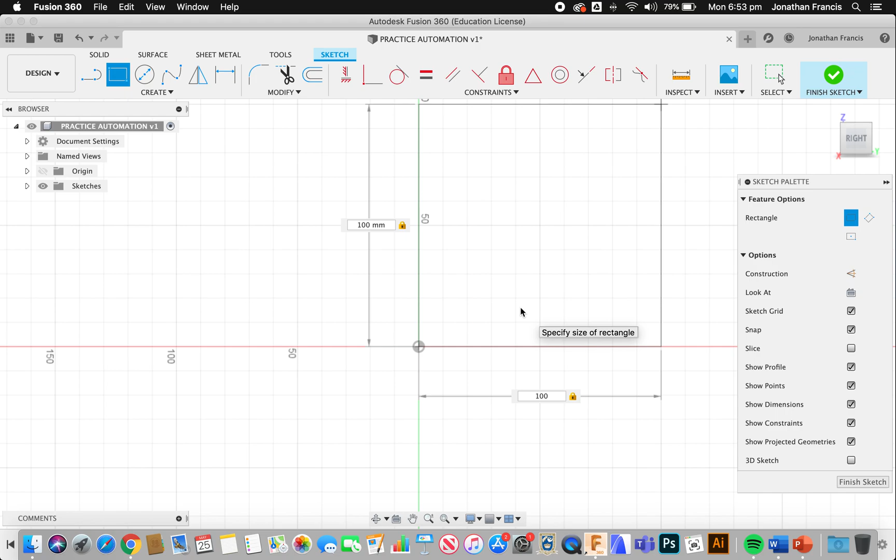Rectangle 100 by 100. We're going to extrude that 3, and that we have is the first shape. Now that's a body, so over here on the left hand side we're going to right click, create components from body. We call this the right side. It's important that we name our components just to keep track of everything.

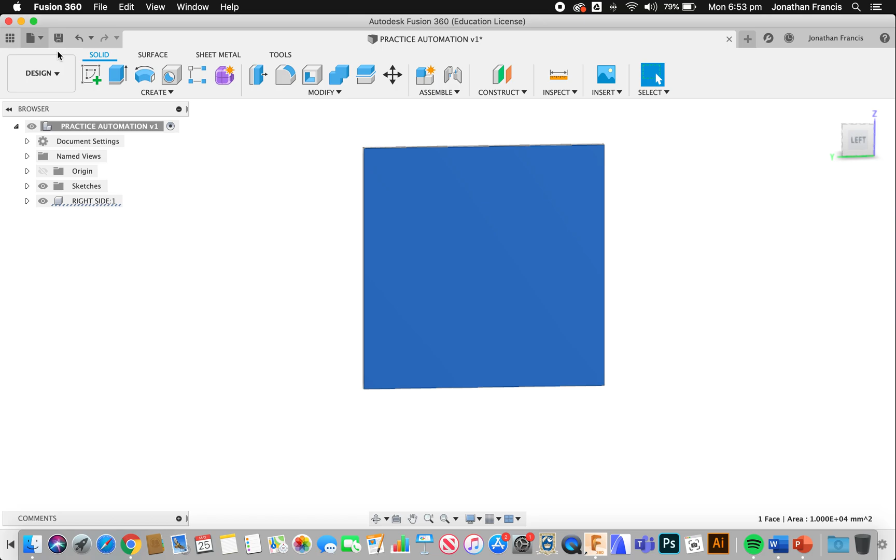Now I'm going to rotate this around, so I'm looking at the left side. I'm going to put a sketch on there, rectangle from the top point, 100 wide, 3 deep. And the reason that we're using 3mm deep for all of these is because our MDF is 3mm deep, and that's what we're going to cut it out with the laser.

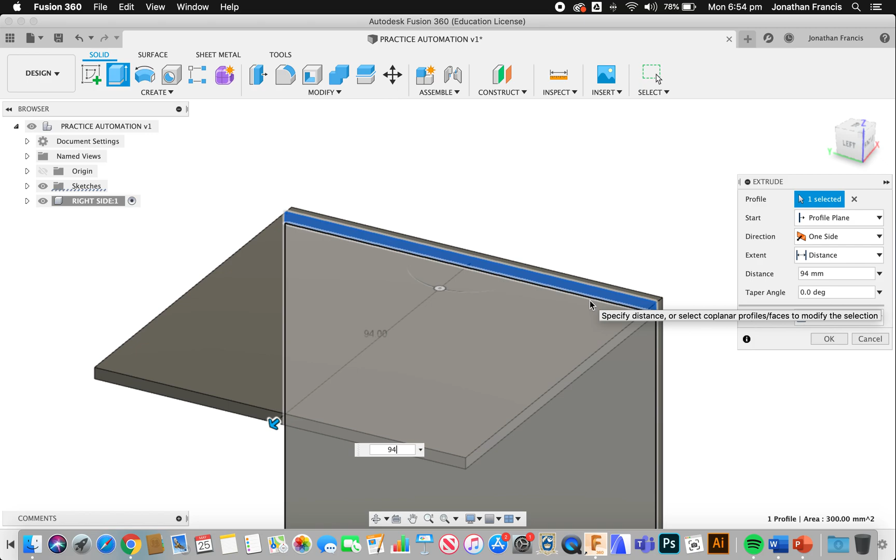So we're going to extrude that shape. We're going to extrude this one 94. We want a perfect cube at the bottom. 94 extrusion plus 3mm either side gives us the 100. And that's what we have there.

So I'm just going to undo that very quickly. Extrude again, we want to go 94. But before I hit OK, I do need to make sure that's a new component. So I'm going to select OK there, rename that component top.

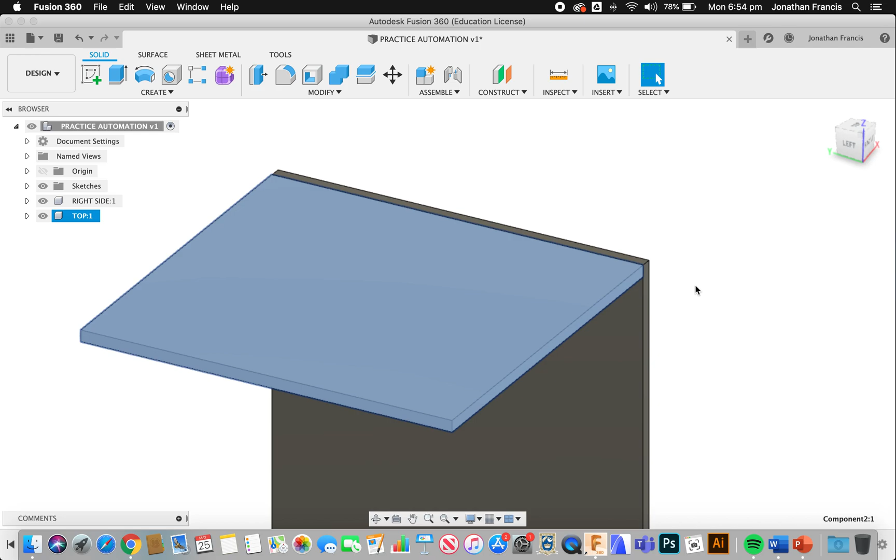I'm then going to select the same face again on the left hand side, another sketch. I might zoom out just a little bit, rectangle, and the same thing on the bottom here, up 3, long 100, and extrude that 94 as well.

Again, we don't want to join that, we want a new component, so we're going to select new component and click OK, renaming that component base. And then you notice I do this all in capitals. It just, when it comes into a drawing, meets the Australian standards and looks a little bit nicer, a little bit neater.

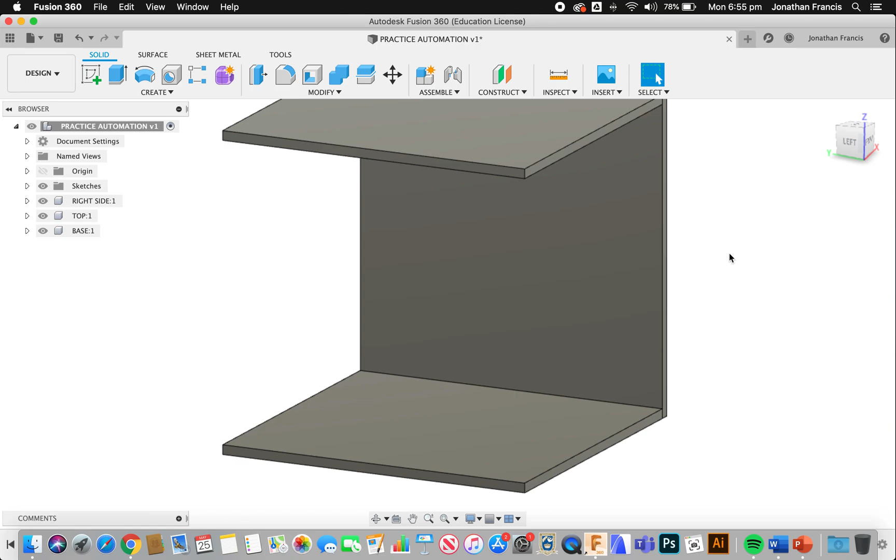So we currently have one side and a top and bottom. So now I'm going to select the edge of the top piece, and I'm going to put a new sketch on there. That's going to be a rectangle, so starting at that top corner, 100 by 100.

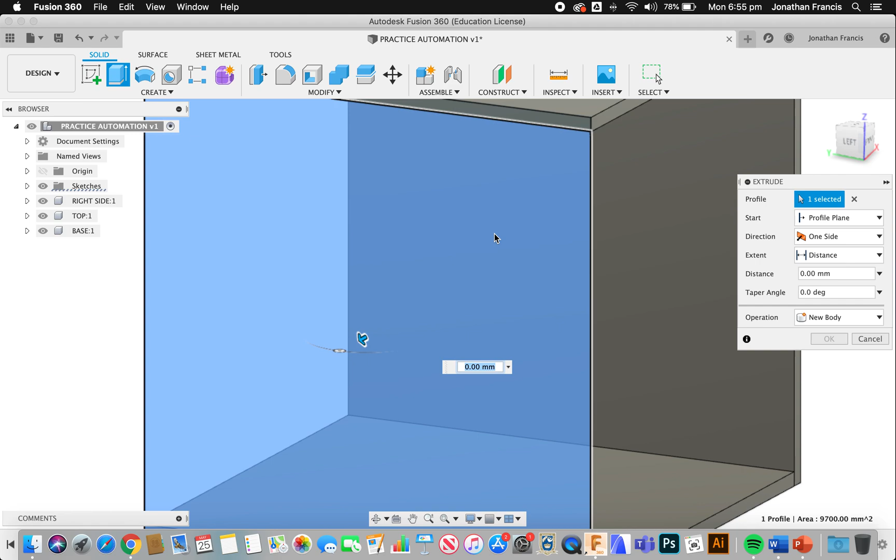And then I want to extrude that as well. Now when I select that, I do have to make sure I go up and get the little bit that's in contact there as well, because we want to extrude the whole thing. We're coming 3 further out, new component, OK, and we're going to call that the left side.

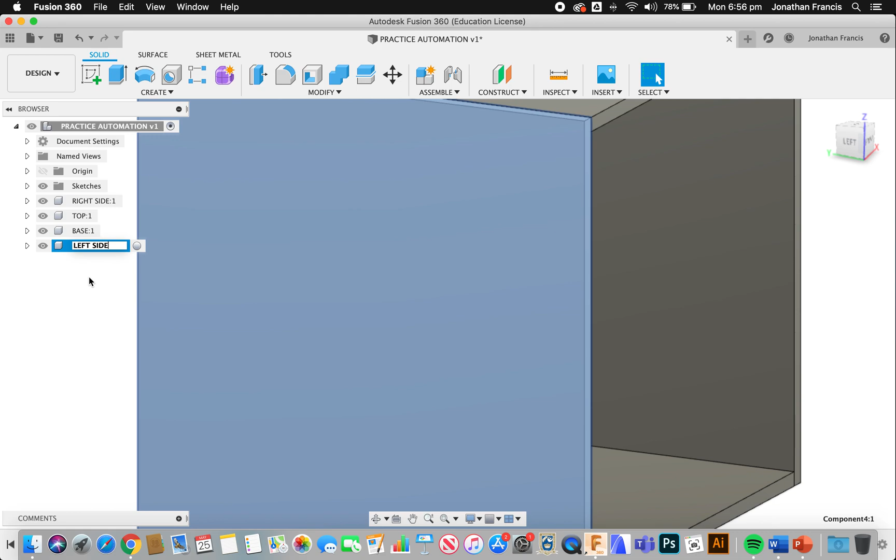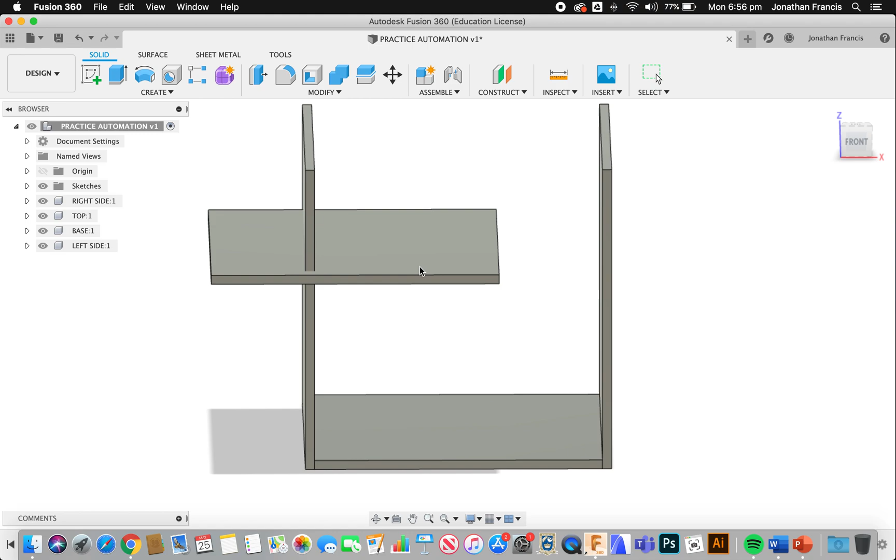Okay, so you can see there we have our base, which is just a box. You can see how we now would join these together with these two. Now these currently aren't joined at all, there's no joinery there. In saying that, we'll put that in shortly. So we're drawing them in situ at the moment, is what it's called, in the right situation, just there as it is.

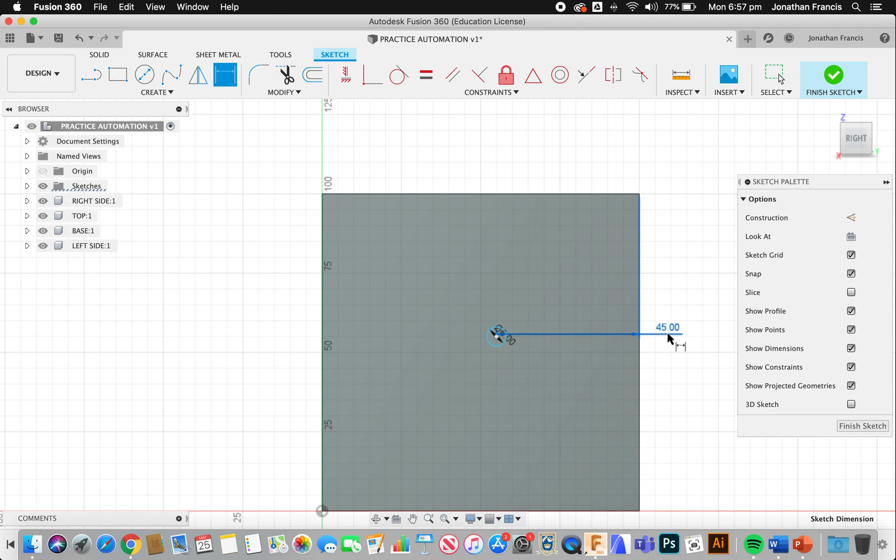Alright, now we're going to go back to the right hand side. So click right, select the side, new sketch. We're going to put a circle on this sketch. So C for circle, throw it in anywhere, 6mm. We're going to use D for dimension between the center of the circle and the outside, and I'll just place that outside there. I want that to be 45.

Dimension again between here and here, and again 45. So we now have that right in the middle.

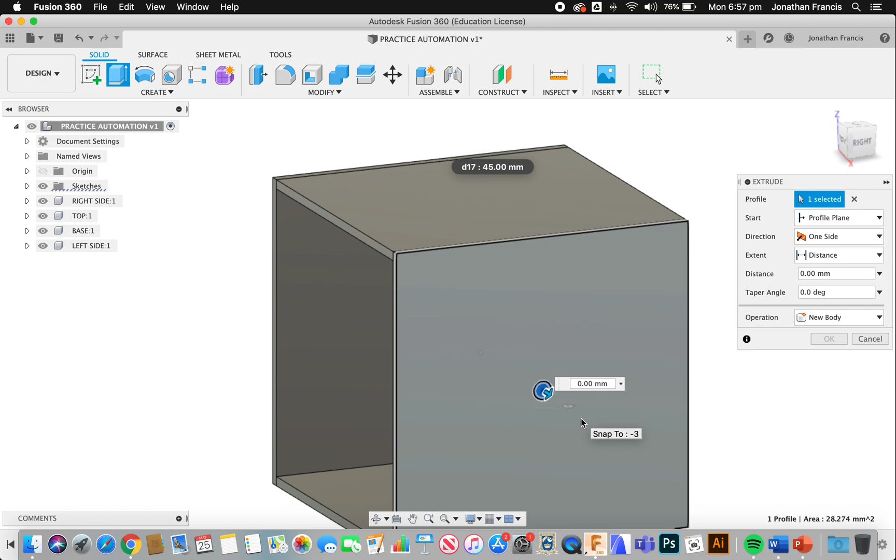I'm now going to extrude. I want to extrude that -3, so just to cut through that first plane there, cut. I'm going to click OK. So now we have our right hand side with a hole.

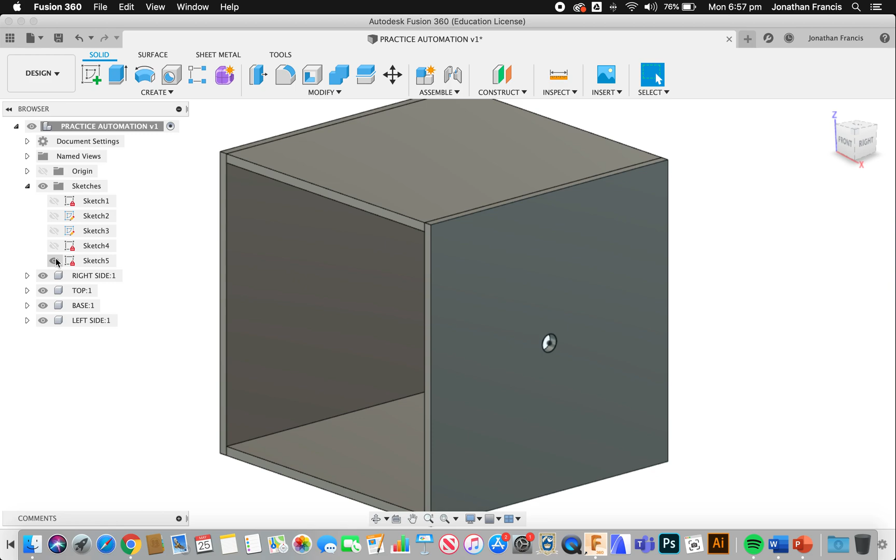Now I also want to use that sketch to do something else, so I'm going to come over to sketches. I'm going to grab sketch number 5, and I do have to zoom in a little bit just so I can get this selection right. I want to select the circle there, and I want to do another extrusion.

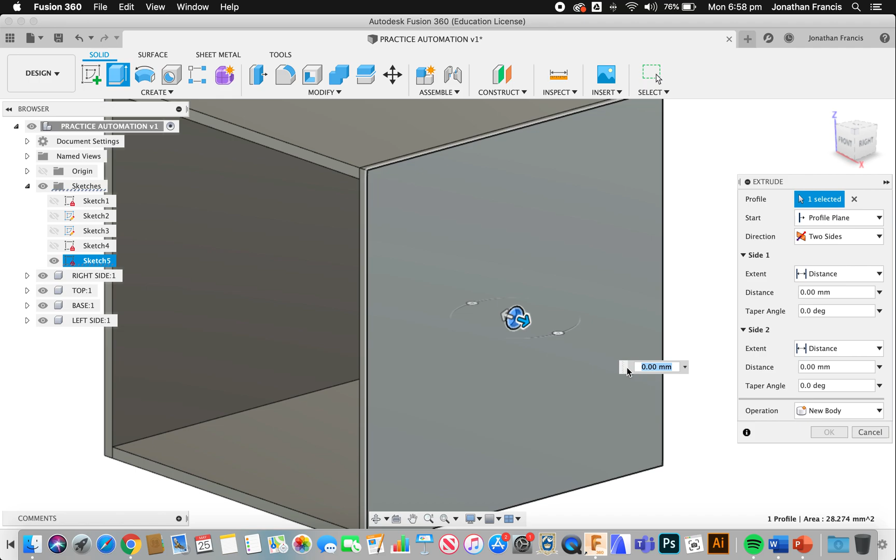But I want to do it on 2 sides. So I'll zoom back out again. This gives me 2 different distances, and I'll rotate around just so we can see which way we're pulling those.

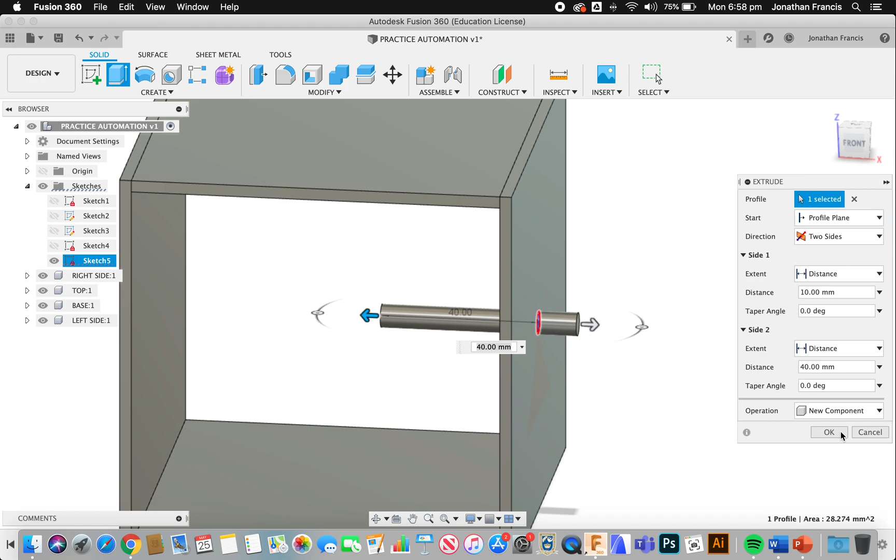So I'm going to pull this one out 10 millimeters that direction, and we're going to go with 40 millimeters in. We don't want to join, we need another new component, so I'm going to go with new component and click OK. So now we're going to change the name of that component.

We're going to call it rod. And that's where we're going to get all our drive from. Here, we're going to place a sketch on the end of our rod.

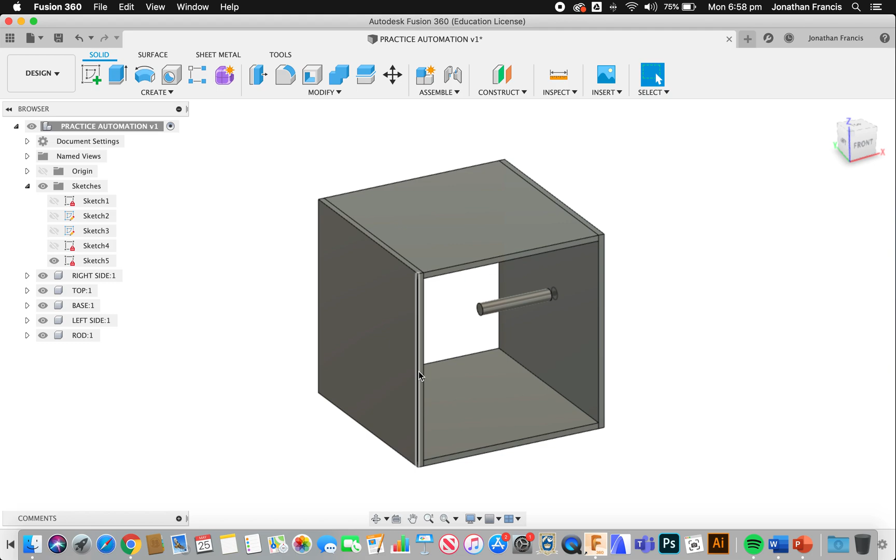Now before we do, we have the left side here, which is a little bit in the way, so we're just going to turn it off. Okay, so over here select the eye, turn that one off. I'm going to select the face.

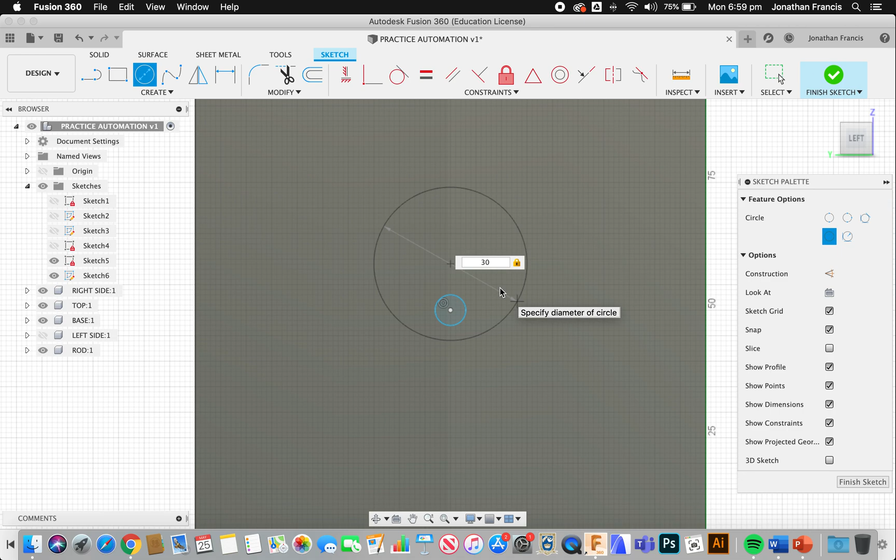On the end there we're going to create another sketch. So C for circle, we want the 6 mil right in the middle, and then I'm going to put another circle. I'm going to come straight up here, place that circle. I want that circle to be 30 in diameter, and I'm going to hit D and just dimension in between these two. I'm going to make that 10.

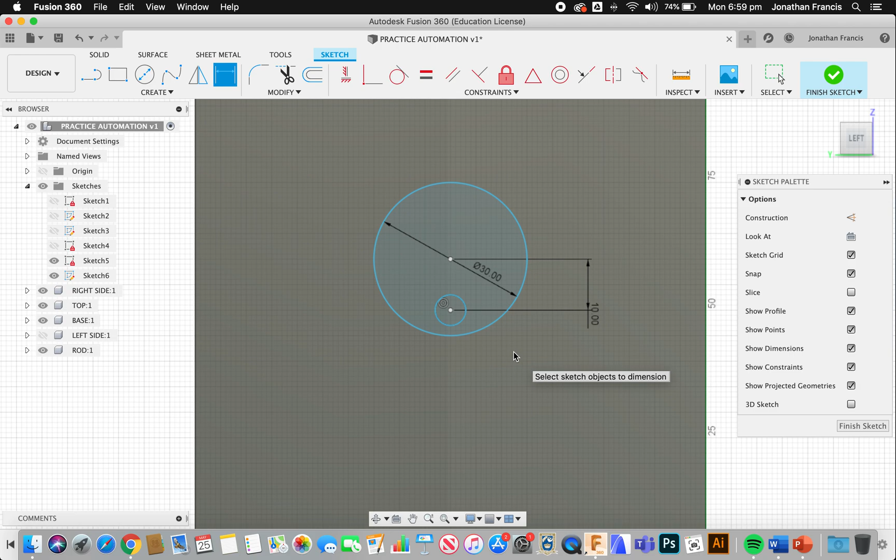This is what's going to give us our up and down movement and make this work for us really well. So now that we've got that, E for extrude, I want to select the outside shape. I'm going to go -3, so it's still 3 mil thick.

Again, I don't want to join it, I want a new component. I'm going to select OK. So this one here we're going to call cam, and like I said, this is what's going to give us our up and down movement.

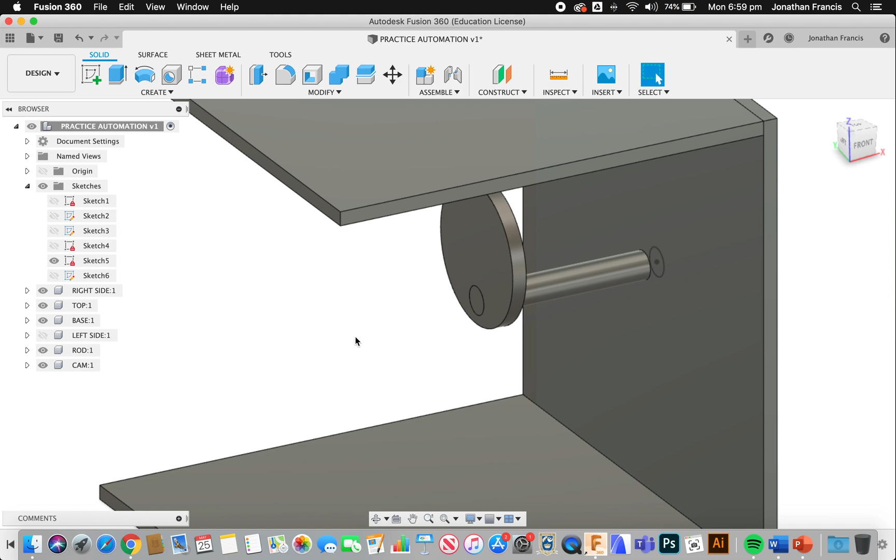So we can probably start putting some movement in there. I'll select this cam, drag it off here. We want to go up to assemble joint. So we can either select joint up here, or we can click on assembly and come down to joint. Alternatively, you can select the shortcut key J.

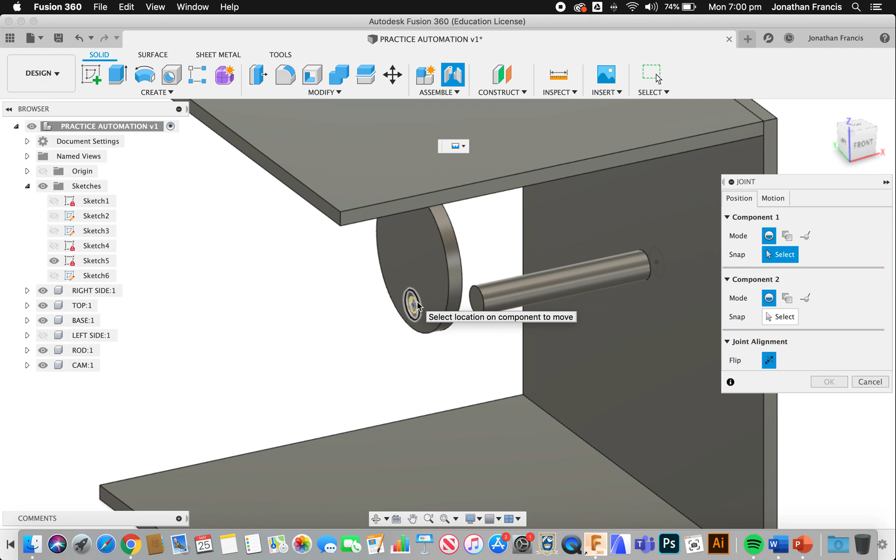We want to hit capture the position. We don't want it to move. And I want to join the end of our circle here with the end of our circle here. You can see those are joined together.

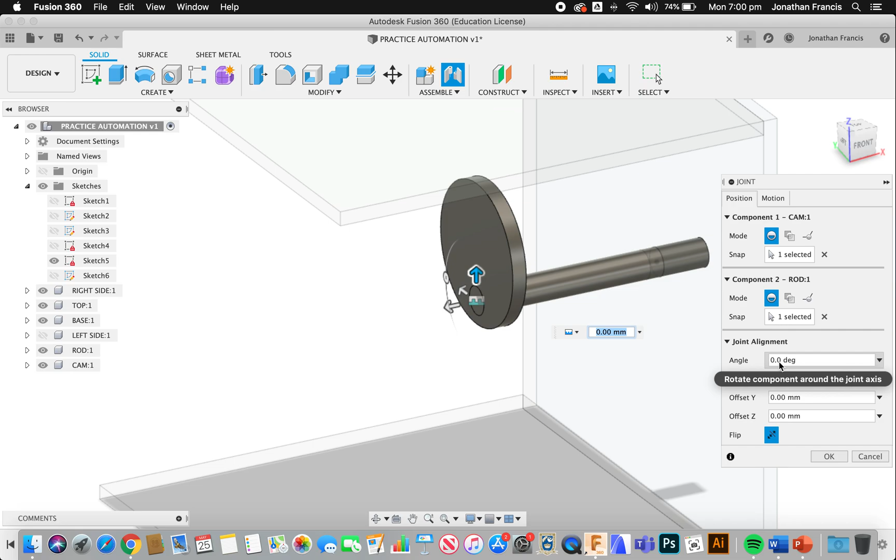In our dialog box here on the right, you can see the position from component 1 to component 2 we've got done. There's no offset or angle that we've asked for, and if we come over here to motion, we have a fixed joint or a rigid joint, which is what it says here. Is exactly what we want, and we're going to click OK.

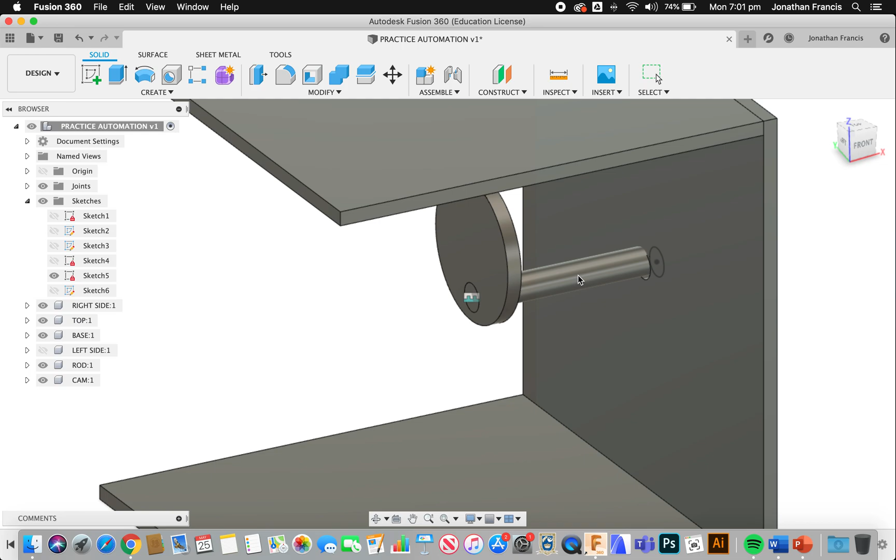The second piece I'm going to grab and move, and you can see that moves then as one piece because it is actually joined together. And so I'm going to push this through here. I want to make sure it's just sort of coming out the side and off to the side a bit.

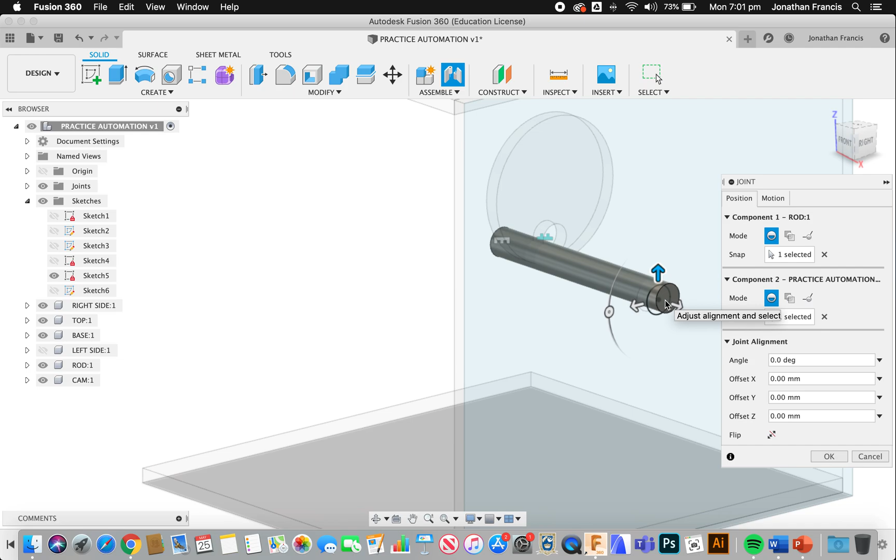I want to be able to select both these circles as well. So again, joint, capture the position on the end of this circle, the end of this one, and those are going to line up. Now this one we want to be offset just a little bit.

So I'm going to rotate that round to look from the front. I'm just going to drag that out, our 10 millimeters. That gives us the 10 mil that we had previous, and it's exactly what we're after.

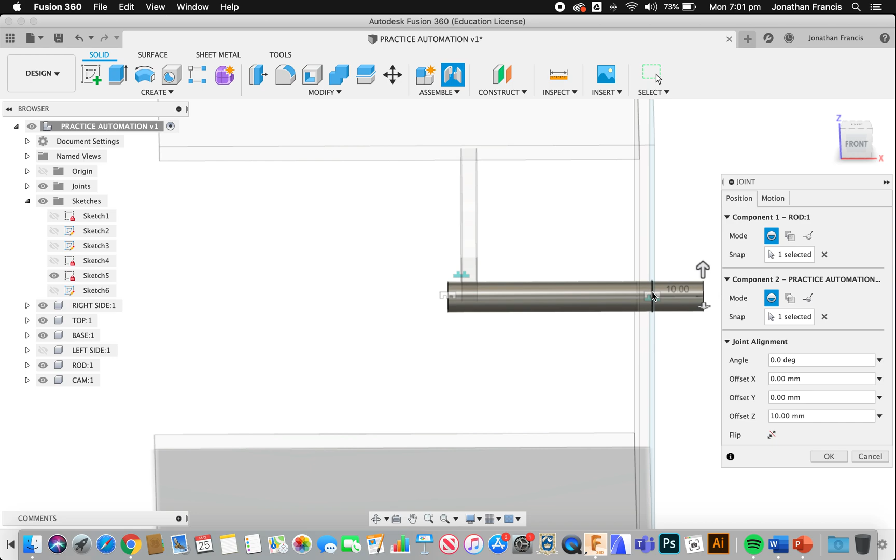So once we've done that, this one, we don't want to be rigid in here. Okay, so we'll just rotate around so we can see again. In here we have the rigid symbol. That's not what we're after this time, so we need to go into motion.

We want this to rotate. I'm going to go to Revolute. When we select that, we can see the arrow going around, and that's going to give us our rotation. So we select OK. Now if we want to test this and make sure just that very simple animation is working, we come over to joints.

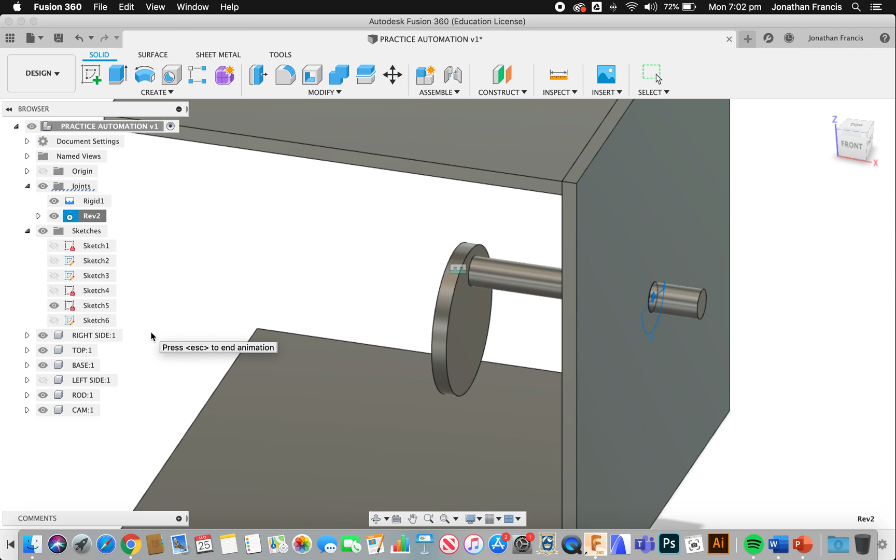We go to our revolve, right click and click animate model. We can see it there turning around, giving us the full range of movement that we need to drive an arm or something like that. So escape to stop that, and we can get back to our drawing.

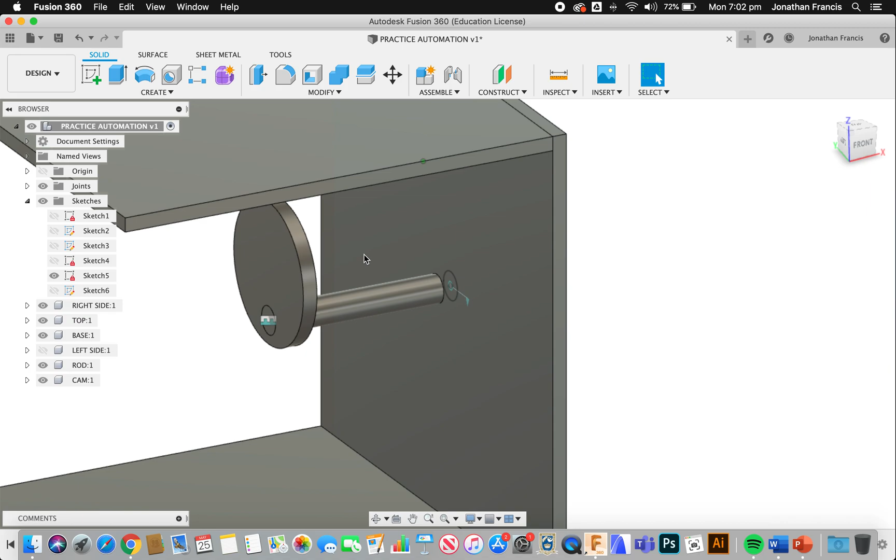On the edge of our circle, on our cam, we're going to put a pin. I'm going to select that surface, C for circle, and come in from the inside. I'm going to make this one 6 as well.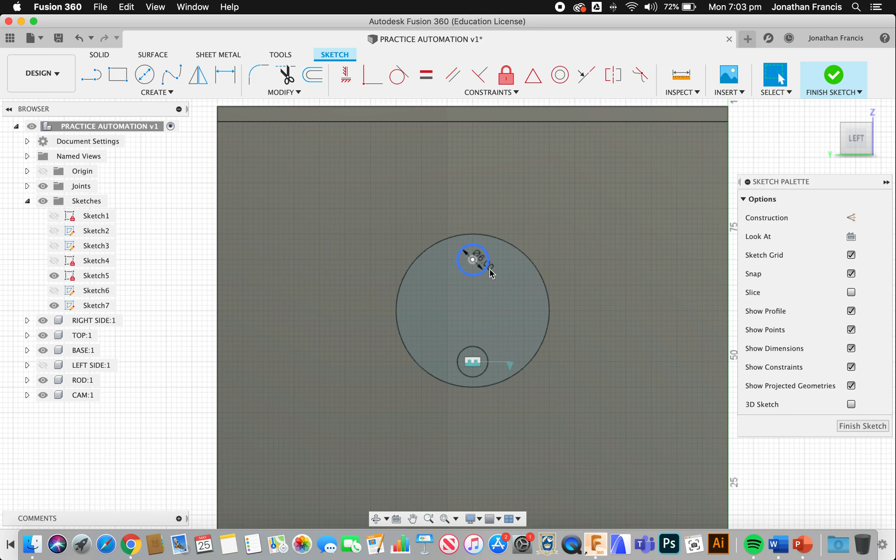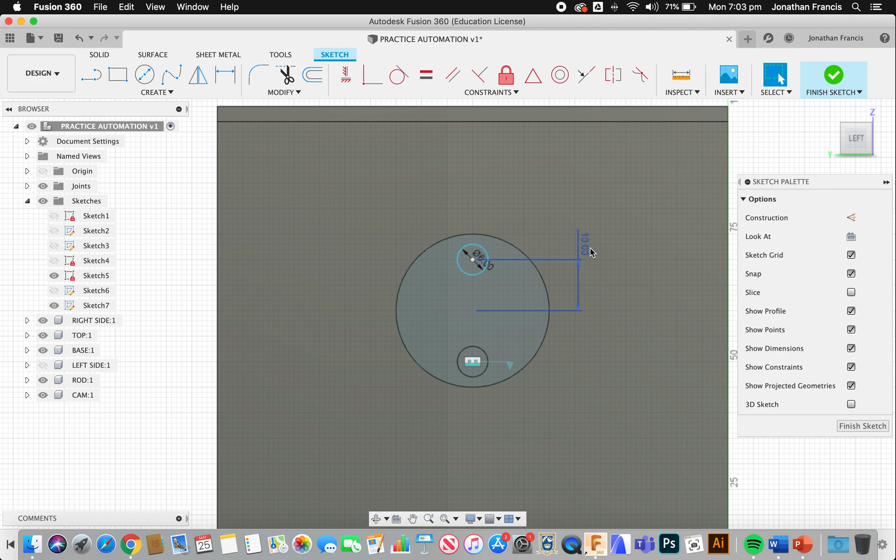It's a fairly reasonable sort of size. We want to offset that, so I'm going to go with distance from the middle, being 10, which is good. Just to make sure that we're right there, we've got 10 there.

We're going to select E for extrude. We're going to grab that one and drag that out. Now, we haven't done a great deal of measuring through this example, so the first thing I'm going to do is select front.

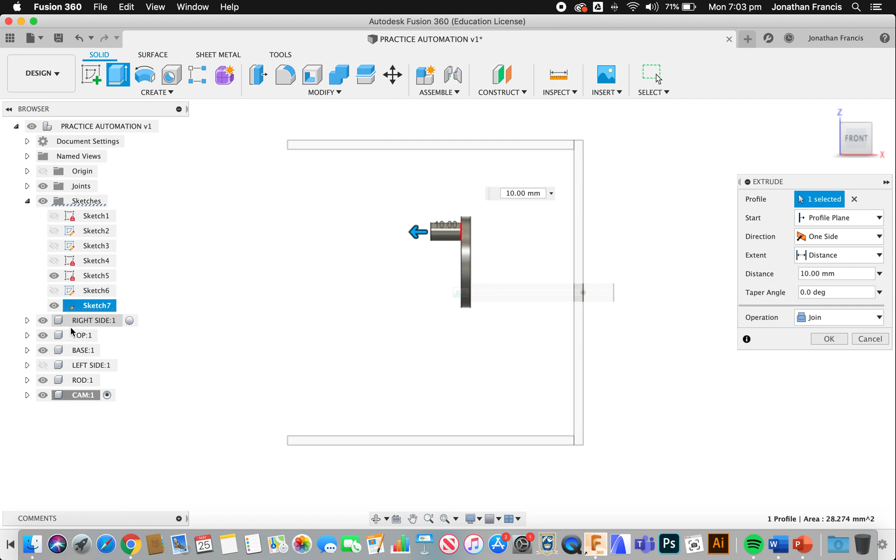Second thing I'm going to do is turn back on that left side, and I want to make sure that this is going to come out much further than halfway. I'm thinking 20 millimeters is about right. This piece we are actually going to join, and we'll just join it as it is to our cam.

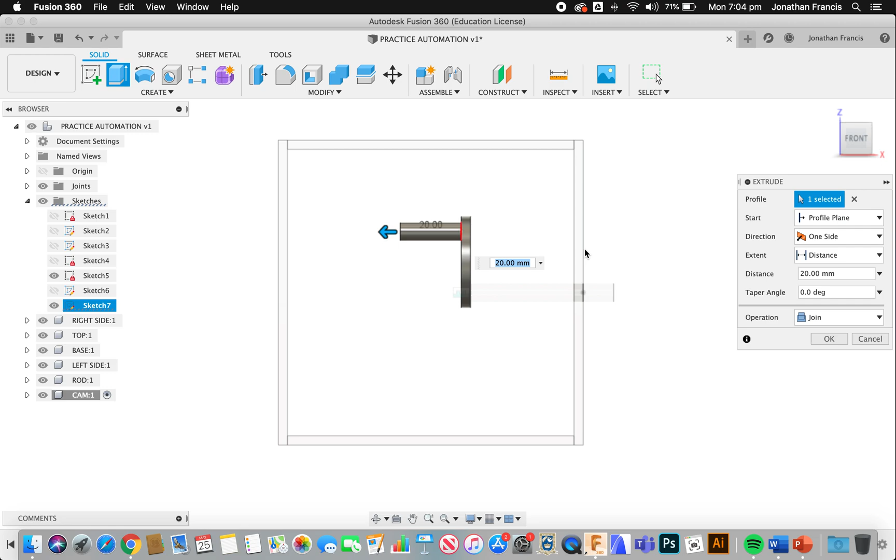Now, sorry, let me rephrase that. I'm going to extrude that negative first and cut. -5 will work okay.

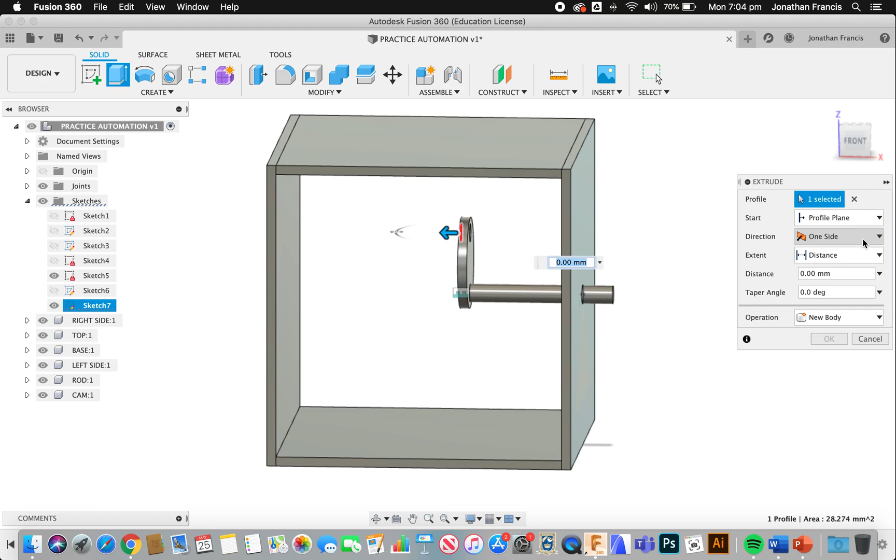I'm then going to jump back to that sketch again, hit E for extrude. I want to select that circle again, and I'm going to go with two-sided. Now the reason that I'm doing that is just for consistency's sake, so I'm going to go with that one going back 3, and this one coming out 20.

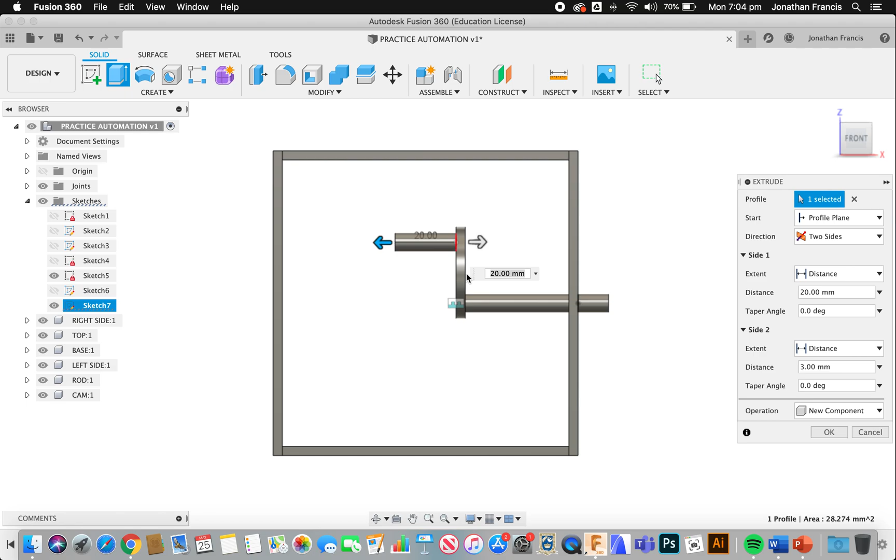We don't want to join, we want another new component, because this cam we can cut with the laser, and 6mm rods we can use some timber dowel. So new component, I'm going to click OK. I'm going to call this one the pin, and we have it there now.

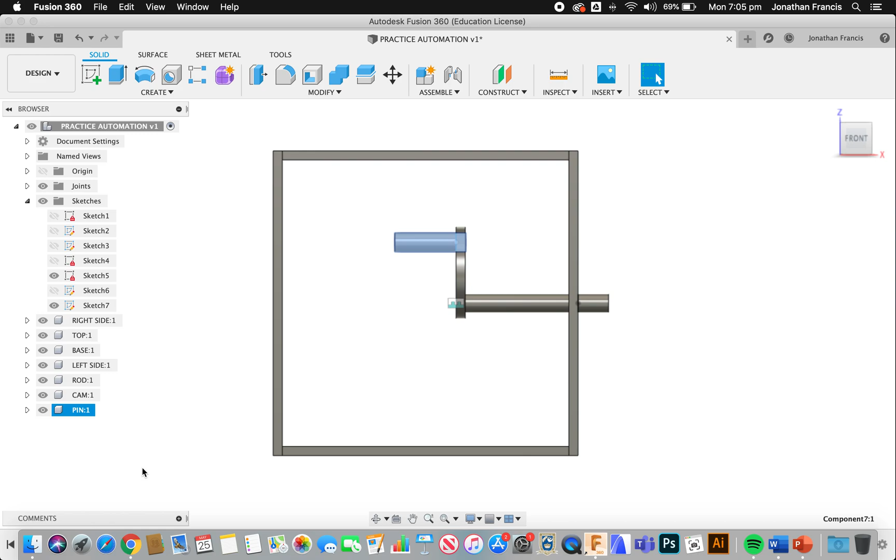Again, that's a new shape. This time I might turn off the right side, because we need to put a relationship in here. This one currently moves.

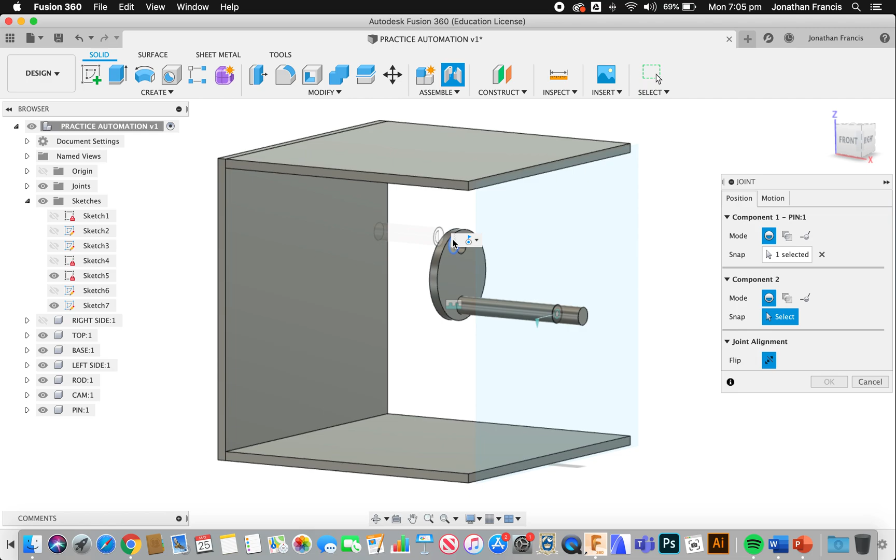So I'm going to select joint, capture the position. I want that surface there, and that one there. Now that one's revolving, which is not really what we want it to do. We want it to stay still. So we're going to lock that one in nice and tight and click OK.

We can then put that right side back. Last but not least, actually, it's not even close to least, I'm very sorry. So we need to select this full part on the right-hand side, right-click, and I want to ground that component. That means it's not going to move. It gives everything else a reference point.

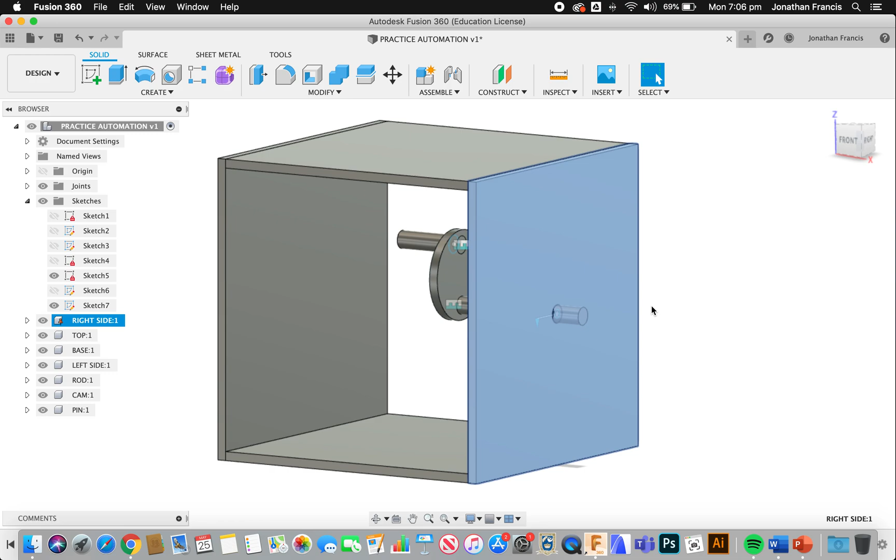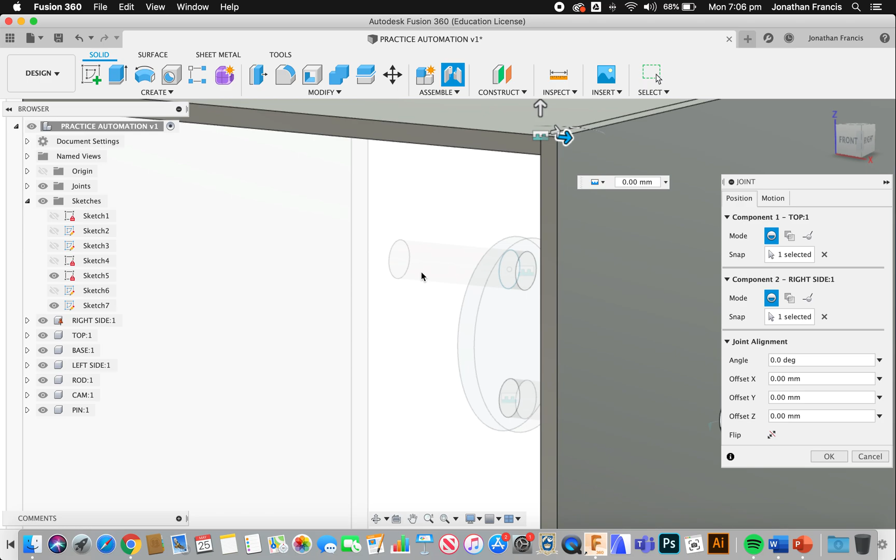These sides, we can still move, and if we want to join these together, the easiest way is join, capture position. We want the top corner and the top corner, and those two will join together nicely. So we can then select OK. That's exactly what we're after.

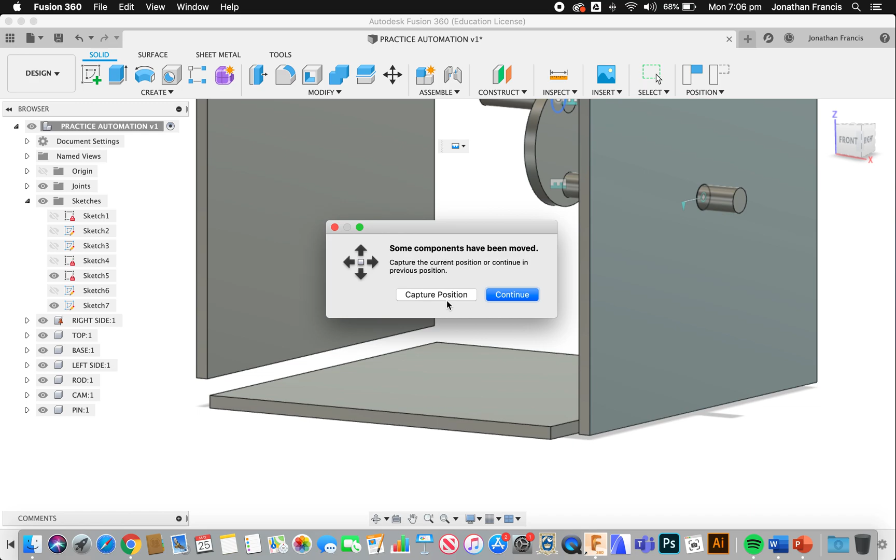And then we can go and do that for the rest of these as well, so you move these out of the way slightly. Just got to make sure you're getting the right corners. Join, capture the position. I want the bottom corner there, the bottom corner here. Done. J for join, bottom corner here, bottom corner here.

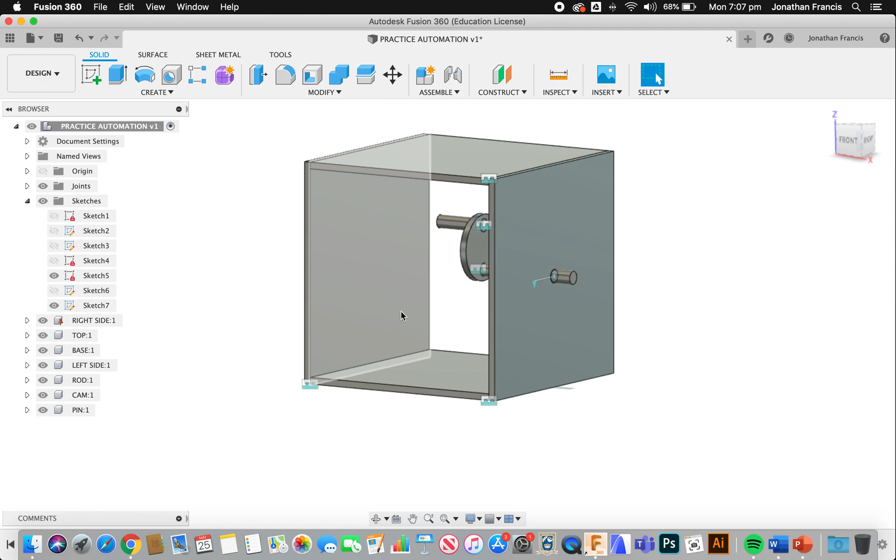We can see now we have joins on all those. We do not need to put a join here because it's restrained by the two in the diagonals, so we don't have to worry too much about that.

Next components we are going to look at creating is an arm that comes off our pin and goes up through the top piece into our next part.